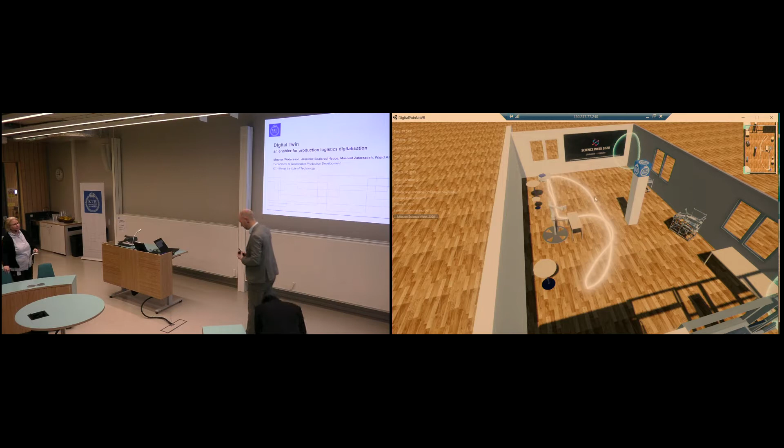Most welcome to this morning session. I think the title was Everyone Wants a Digital Twin, and I think that's pretty much what we experience these days.

So we're a team that will present the advancements of a lab development. I will not talk much. Jannike is the project leader for a project called Digilog, which has been the main drive for this development. We have Masoud here, and Wajid and Guyong is actually down in the lab ensuring the technologies are working, but they deserve a lot of credit as well.

I will take just a few. This is what we'll talk about. I have a few minutes of introduction, but then Jannike will talk a little bit about the digital twin, and then Masoud will introduce the testbed that we have, and we'll try to hopefully get some demonstration to work. You know how it is, but let's cross our fingers.

I would like to spend just perhaps 2 minutes on the research environment that we have here at KTH, because we try to collect all the research groups on one day. If you have the chance, there is a program in this room all through the day to follow different sessions. We have 3 research groups, and the team presenting this one is within production logistics. We have a research team on production management later after lunch, and a research team on strategic maintenance that will have a session at 11.

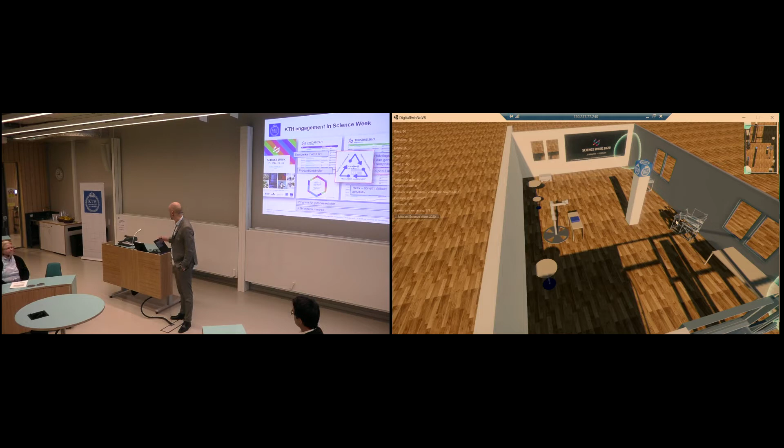As I said, during this Thursday we will have this focus on the 3 teams. I would also like to invite you to the open lab. During lunch today and lunch tomorrow, and at 2 o'clock I think tomorrow, the lab will be open downstairs, and there will be demonstrations every half hour. So if you have the possibility, you can hop in there.

Apart from that, there's a lot of nice sessions. Lean Center has their whole day tomorrow. But today, if we focus on the research, this is the agenda as you see for the day, and this is the session when everybody wants a digital twin. So the 3 teams will present different aspects from different projects during the day, and I think you will introduce what projects contribute to this session. So by that, most welcome, and I'll hand over to Jannike.

So now you should be able to hear me. I thought I should start a little bit about what is the digital twin, because there is a lot of different discussions about when we talk about digital twin, which everybody wants to have, we have different opinions on what that should actually be. There are around 40 different definitions of a digital twin, which shows the broad spectrum.

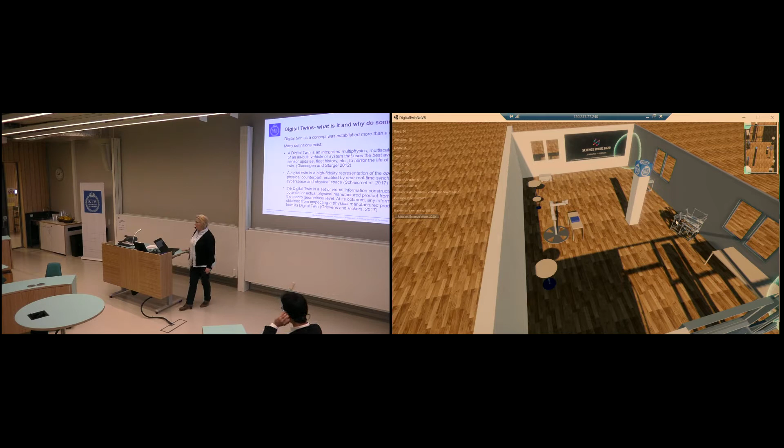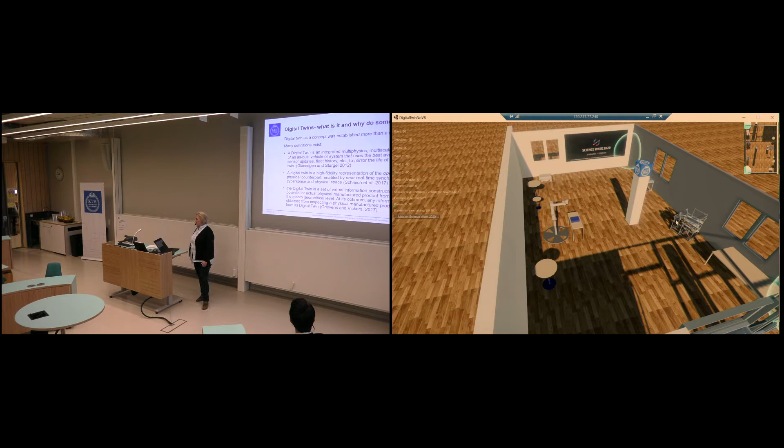I selected 3 of them which fit quite well into what we are doing. I selected one from Glaessgen and Stargel, which tells that a digital twin is an integrated multiphysics, multiscale probabilistic simulation of an as-built vehicle or system that uses the best available physical models, sensors and updates, and fleet history to mirror the life of its corresponding flying twin.

As you see, since it's a flying twin, it's from the air industry, but you can also use a similar one for logistics with some modifications, which I will come back to afterwards when I talk about the challenge, and which you will also see when we have the demonstration by Guyong and Wajid later today.

We also have that a digital twin is a high fidelity representation for operational dynamics. It should be the physical counterpart, and there when we talk about the physical counterpart, we have the problems with the modeling already in having the physics. For instance, if we use Unity, as you will see that we have used later, it's not so easy to get it in there. But it can also be a digital twin, a set of virtual information that constructs and describes something, which is what you often use in the product development part.

And in a lot of cases, that is also sufficient in the production logistics part. So this is the background of what we're doing when we look at what we mean with a digital twin. But for the daily operation, we normally use some short connections, where we just say that our digital twin can mirror and simulate complex scenarios very close to reality, and we can use it for different things. However, when we say close to reality, that is where we start to do the modification and the reduction of the complexity.

If we use it for simulation, we will have to look into the granularity of what we're actually looking for. If I have a digital twin and I want to investigate how a robot is moving, then I would have to have a much more detailed digital twin than what I'm normally looking for, which is the flow of material, where I can have a quite high level digital twin. That is what we will see today, but where I still can get the information out. But that also means that if I have designed a digital twin for something, I cannot just reuse it for something else.

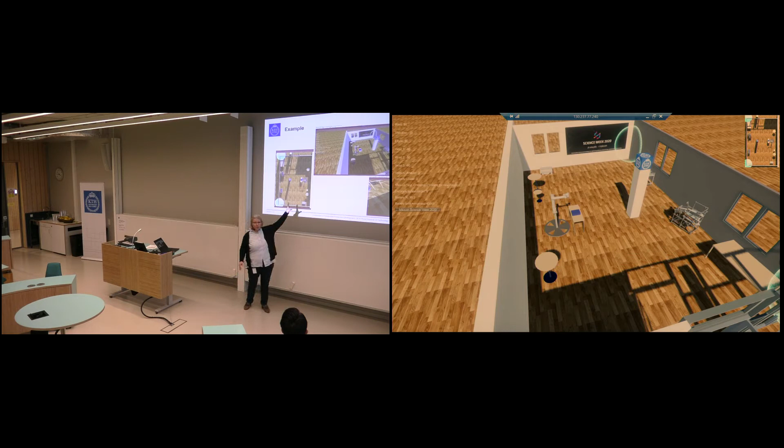So here you just see a second example. It's exactly the same example, but what I wanted to show here is that we can change the perspective, so that will also give us an opportunity to look at it in different ways if I want to investigate something.

Here we can of course make a replay of it, and then I can, for instance, take a detailed look at how this moves, because this is from the reality—so that is how it exactly moves, which I need to understand and analyze in order to be able to change the digital twin later.

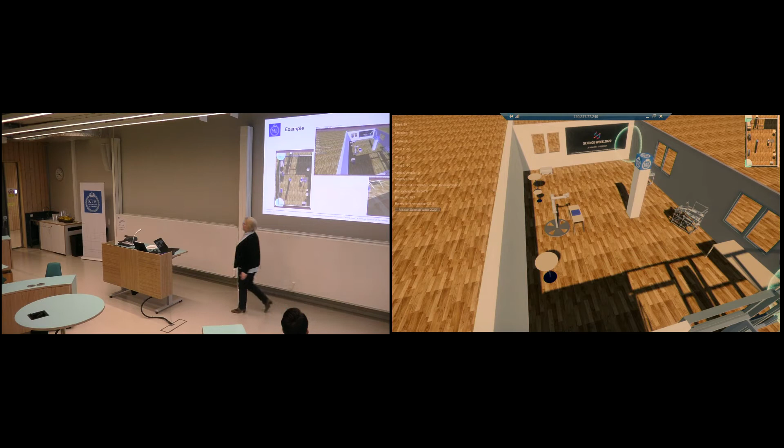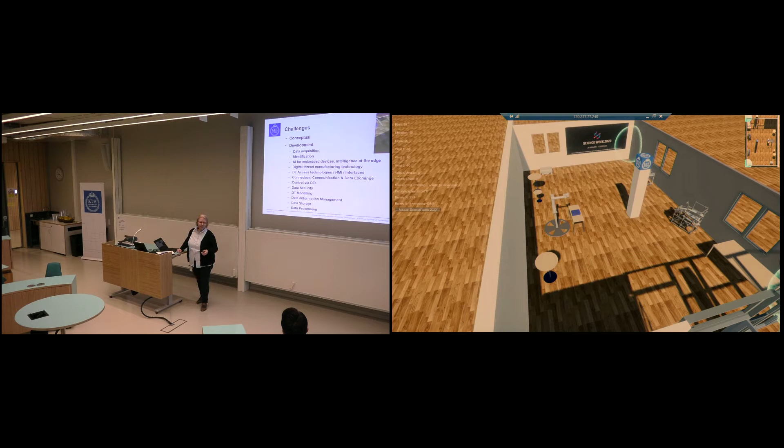But if you look into data acquisition, and think of if we want to use it in the planning process—where should I get the data from? I don't have the real data because I want to do it before. So how would you want to model that? The second one is you often have to do manual data acquisition, and that is very time consuming. That, again, depends on the maturity of your company, which you saw in the beginning, where I had these three where you can profit from your digital twin.

And we have a lack of standardization. You see that quite easily when you look at the 40 different definitions we have of a digital twin, and that we do not have a specific standard. That is also because we use it for a lot of different things, so it's not always about that we do not have a standard—but the more important thing is the accuracy.

Even if we have accurate data, it's not so easy to get the digital twin to exactly do the same. That means every time we make a decision based on what I've seen and analyzed in my digital twin, I have to take that into account. That's the same as if you look into simulation models, so there's not really very much difference. For a long time, a lot of the simulation models have been quite similar to that.

Another very important issue is actually who's owning the data and who's getting access to it, and what can you do with that. We have the possibility to collect data, but we're not so far now that we have very good ways of visualizing what we're collecting. That makes it very difficult for us to analyze. So that is two of the things we are working on.

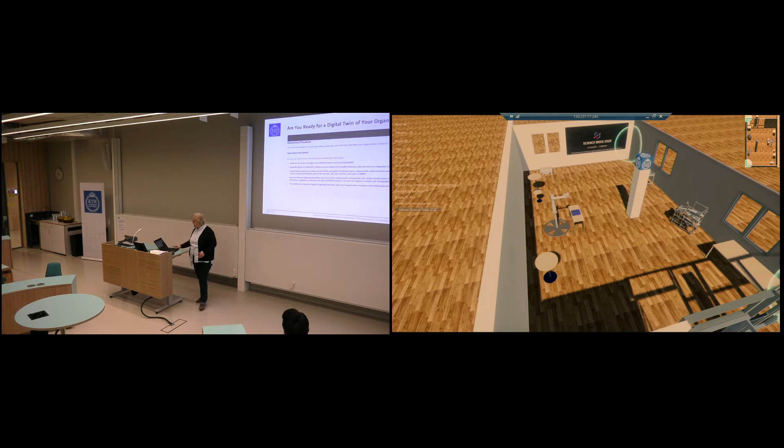Yeah, okay. I will talk a bit about the associated projects that we have, and how digital twin and the testbed can help these projects achieve their goals. Apart from the first three projects, CPALS, LOVIS, and Digilog, Unilog is a project we use for educational purposes. The testbed we have developed here is going to be used for students to learn, practice, and have hands-on experience developing digital twins.

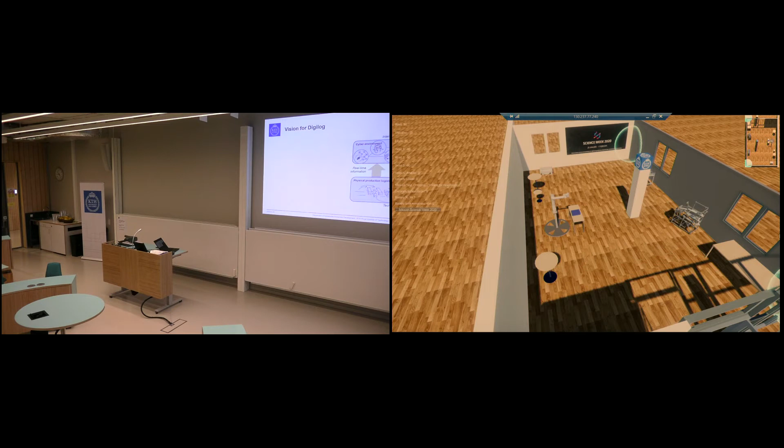We have a vision for this testbed developed here at KTH, which is also combined with the testbed we have at Scania and one under development for AstraZeneca. The vision is to have a physical production logistics flow as a normal situation, and create a digital twin within a cyber environment that exactly mirrors what happens in the physical environment, tying these two environments together through real-time data.

So we fetch data in real time and send it to the cyber environment, analyze the data, get the application we want, and send it back as support for decisions to the physical environment. This way we can plan and optimize what we want to do in real time. Instead of sitting and simulating to see the best option, we do that in real time. That's the vision.

When it comes to a practical project, we have one example: LOVIS, visibility in logistics. As you probably know, the level of visibility in logistics is usually lower than in manufacturing. So it's really important to know exactly what's happening, especially at the interface with inbound and outbound logistics. We need to understand internally how transparent the system is for itself, how different persons, systems, and parts of the organization know what exactly is happening and why.

Then when we talk about the supply chain, about cooperation with retailers and suppliers, it's still the same question. The suppliers are keen to know what happened with my customer, and the retailer wants to know what happens with my supplier. When I get the parts, how can I get them? What is the quantity? What is the time? And so on and so forth. So by having a digital twin, a smart model behind the whole process, we can support answering these questions.

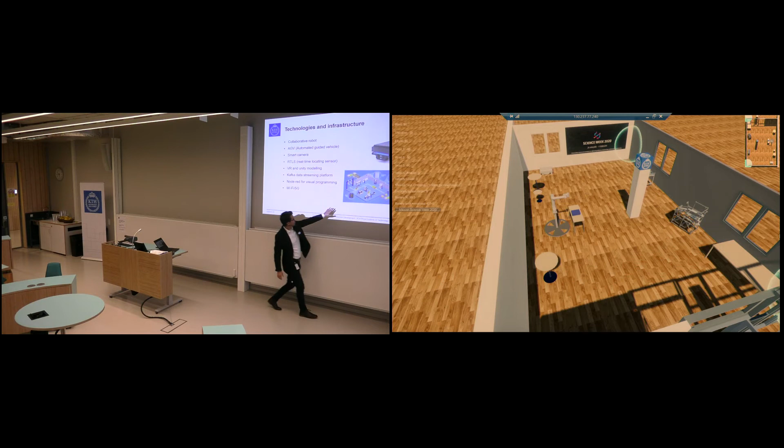Then we have the RTLS, real-time locating sensors. This technology—the picture isn't big enough to see details—has sense points you can place around the environment, and tags that can be tracked in real time. It's very much like an internal GPS, quite helpful if you want control over your flow in production logistics.

Once we have collected all the data from the physical devices, it's time to ask how to manage and stream this data. We decided to use a data streaming platform called Kafka Apache. I will explain shortly how it looks.

Then, how to manage the orders—we use Node-RED, a visual programming data platform. For connectivity between devices, right now we are using Wi-Fi, but we plan to move toward 5G, which we think is faster and more stable.

Here I have two films, hopefully they work. Before we start, imagine how a production logistics system looks today when it's not automated, and compare it with a situation that is digitalized and automated.

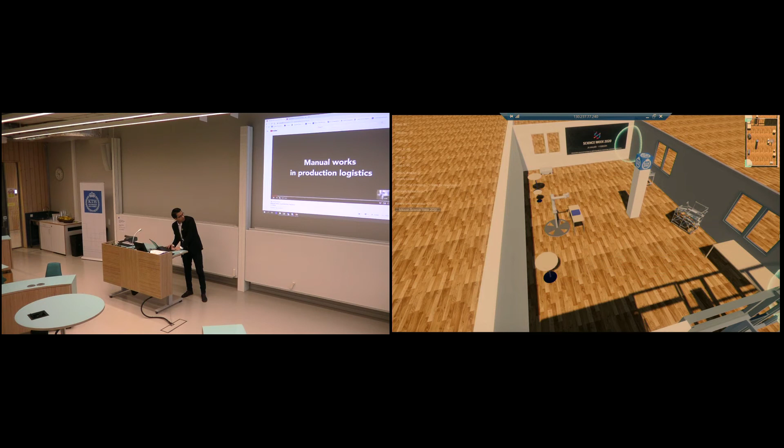This is an example of the kitting process. As you see here, the operator gets a manual, tries to read and understand what parts should be kitted for the next production. So he picks the parts, puts them in the box. It's a bit exaggerated, but just want to show that it has some physical work. He has to move everything around, physically push the button of the door, hold it himself.

And here, since we have an elevator and we want to deliver the parts to the pedal car factory that we have on the second floor, he has to go through the elevator and do all the work manually. Probably he even needs someone to hold the door for him.

Now we can see the digitalized version, which is kind of a vision for us. As you see here, the operator is now controlling the process instead of doing all the manual work. The UR collaborative robot, which is standing close to the operator, does the kitting, and the AGV, which is responsible for transportation of the material, is called by the robot once it's done, to transport the parts. Now you see the AGV talk to the door, open it autonomously, and do the same thing with the elevator, and finally with the door of the lab. There are some fake elements in this movie, but this is the vision that we want to have.

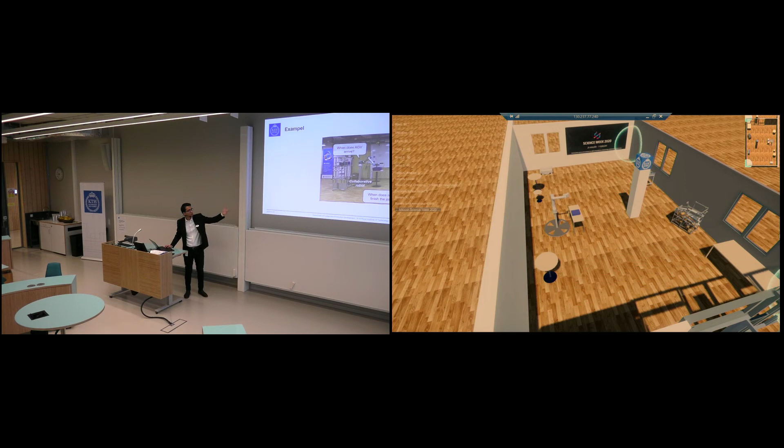This shows an example of when they want to collaborate with each other. This is the question that the UR robot needs to know: when does the AGV arrive, and the AGV needs to know when the robot finishes the job. So instead of scheduling everything in advance, we let everything happen in real time and make the collaboration and scheduling based on the actual situation.

About the data streaming architecture, if we compare with the traditional way of connecting everything together, let's say we have RTLS, AGV, camera, and robot. If we want to connect them together, we should do a peer-to-peer connection, which is really complex. If we want to add new technologies, we have to repeat the same process again and again. And if we want to remove something, we should be careful about what else is still in that place so it doesn't hurt the whole system.

Instead, there is a technology called Enterprise Service Bus, which is dedicated to helping the system so the data goes through this channel. We just need to make an interface toward Kafka. So we connect everything to Kafka, and then data, let's say from the AGV, goes to the camera and to the robot, even without sending that data directly to the camera or the robot. The data streams through this Kafka server, and the robot and camera that need that data will consume it.

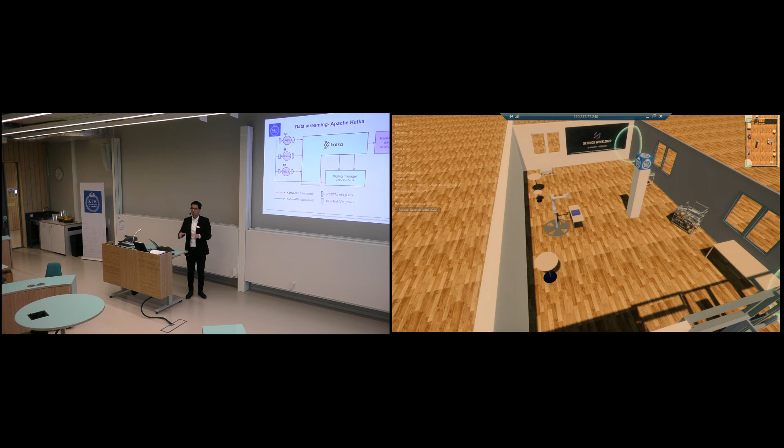In terms of connecting the devices to Kafka, we used a RESTful API to get the data from the devices and post it to Kafka. Here you see we have the manager that manages the stream of data. As an example of applications, we have a real-time data analyzer, so we can have dashboards, logistic heat maps, and real-time 3D models. We see in real time where in the lab we have the highest density of movement.

Or where we have accidents, where we have lots of inventory, and so on. So it depends on us. Now I think we can switch to demonstration. I have Wajid and Guyong downstairs connected through WhatsApp. Hello Wajid, can you hear me? Let me just switch for a few seconds.

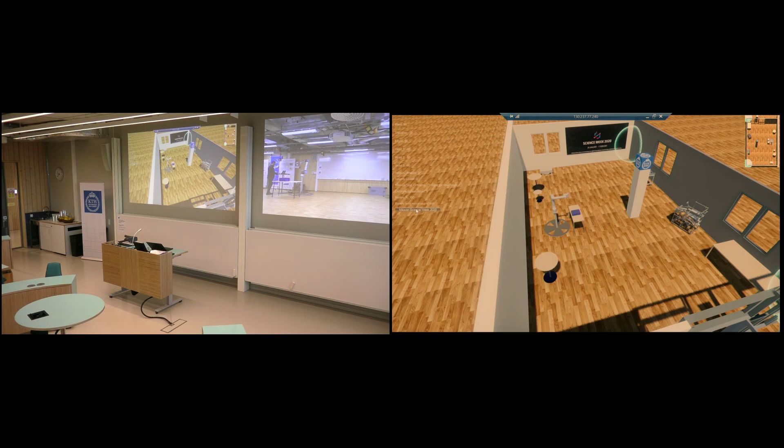There's a 3-second delay from Twitch, so what's happening in the digital world is ahead of reality. The object has been recognized, there's a bit of latency. The universal robot will pick up the signal from the computer, from the program I've written, and start moving. Before it moves, I'll click the button to call the AGV to pick up the box.

As you can see, the UR robot is moving, and you can see the same thing in the digital twin as well as in real time.

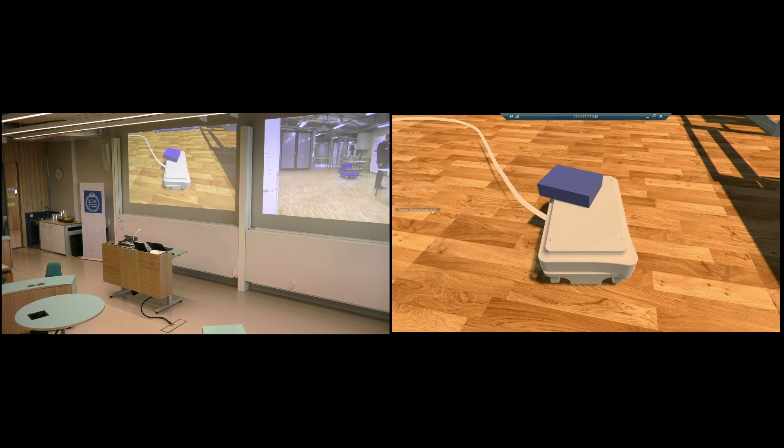This situation represents the UR robot picking a box, placing it on the AGV, and the AGV delivering it to the next station, which can be quality control, or a place where another operator puts an object inside the box and delivers it to the next destination for the AGV. As you see here in real time, you get the spaghetti diagram on the digital twin.

Just to give an example, if you stay in the middle of the path the AGV is trying to go, you get another type of spaghetti diagram, and later you might be able to analyze why this happened. Imagine working in a real situation where you get lots of these deviations - finally you realize this operation is supposed to take 10 seconds, but now it takes 12 seconds instead, because of obstacles in the way. So how can I plan for this in the future?